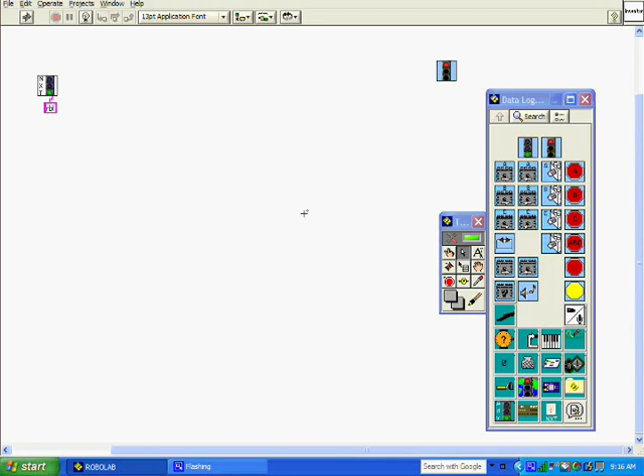To start this, let's go to the Structures menu, then pick Jumps and Lands, and pick a red land. Left click and drag. This land icon indicates the start of our loop.

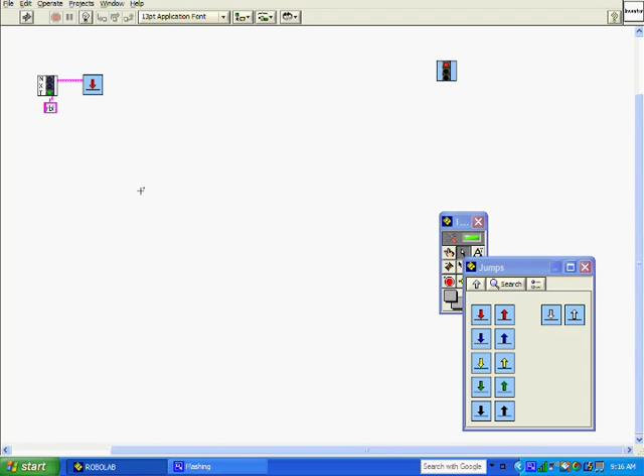We need to utilize a light sensor to indicate what the color of the surface the robot is on. Go to Forks, choose NXT Light Sensor Fork. Left click and drag. There are 6 ports with this icon.

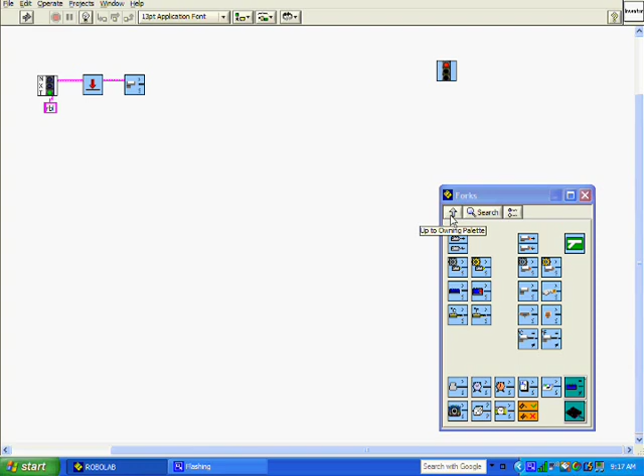The first port we'll look at is called port. On your brick there are numbered ports from 1 to 4. This is where you connect your light sensor to. I am choosing port 1. Now to do this, go back to main menu, then to modifiers. Then choose input 1, and then connect the port to input 1.

The light sensor will measure the amount of light reflected off a surface. They will express the amount of reflected light by a unitless number. Lighter surfaces reflect more light and have a higher number. Darker surfaces reflect less light and therefore have a lower number. The compared-to number is a threshold number that decides if you are on a dark or light surface.

Right-click over this port and create a constant. I'm going to choose that my threshold number be 45. However, this could change in different lighting environments.

So in my case, if the reflected light is more than 45, the robot is on a light surface, and I will only want the right motor to move. Now, if the reflected light is less than 45, then the robot is on a dark surface, and I will only want the left motor to move. This will induce what is called a penguin walk.

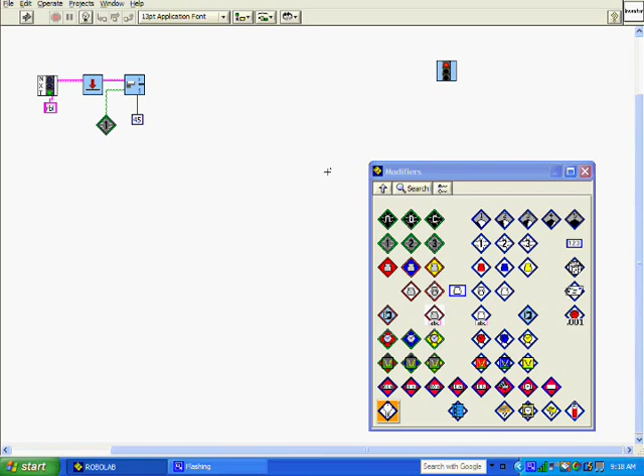Let's start with the first case, when the reflected light is more than 45. To start this, go back to the main menu, and first start with the stop sign: stop all ABC. We want to connect this to the port where it's more than. And now, we want motor C to move forward. Connect this motor icon to the stop sign.

Similarly, we can do the same when it's less than 45. Connect another stop sign to the less than port, and then connect a motor A forward icon.

Also, let's select our power levels for these 2 motors. Go back to the modifiers menu, then select power level of 2, and connect both of these motors to this power level. So now we've created a set of commands that allows our robot to follow the right side of a dark line. However, we have not told it how far to travel on this line.

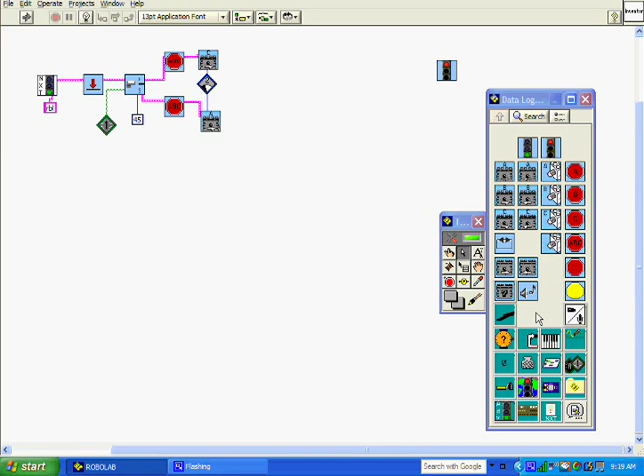The first step in solving this problem is to merge our fork. So go to the Structures menu, then go to Forks, and then go to a Merge. Connect your 2 motor commands to this merge.

To command how far along the line the robot will travel, we will use an NXT rotation sensor fork in the Forks menu. Connect the merge to this new icon. Now notice we need a port to measure how far along the robot has traveled, so we'll measure from motor A. Go back to the main menu, then to the modifiers, then go to output A. Connect port to output A.

Just like in the light sensor fork, we need a compare-to number. In this case, this is the total number of degrees of rotation for motor A. Right-click on this port, then create a constant, and type in 1000 degrees. So as the robot travels along the black line, it will continuously compare the total amount of rotations to 1,000.

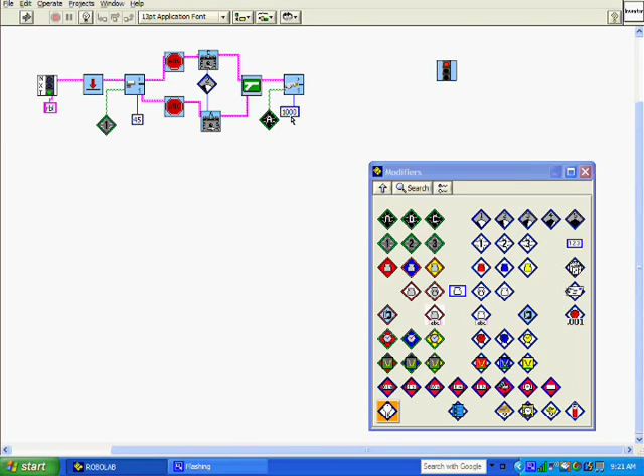So let's take the case when the total rotations is less than 1,000. We need to continue the loop through a jump command, which will then go back to the land command. We need a jump command to complete our loop. To do that, let's go back to the main menu, go to Structures, Jumps and Lands, and then pick a jump.

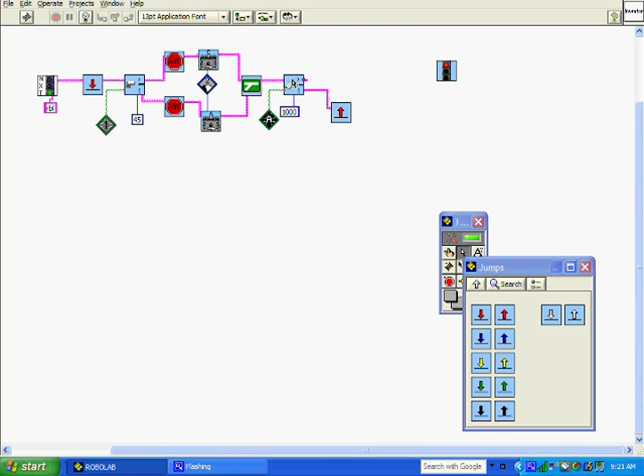Connect that when it's less than. The other case is when the total number of rotations is more than 1,000, and that's where we want to end our program. So first, let's get a merge.

Connect the bottom to the jump command and the more than to the top port, and then connect it to the red light.

So let's review this program once more. We start our loop with a red land, and then we go to a light sensor fork, which senses what surface the robot is on. If it's on a lighter surface, it will turn only the right motor. However, if it's on a dark surface, as in the dark line, it will just move the left motor, and it will induce what's called a penguin walk.

This will continue for a certain amount of distance, which is noted in the rotation sensor fork, at 1,000 degrees. So this program will continuously turn until 1,000 degrees is met. If it's less than 1,000 degrees, it goes back to the loop, indicated by the jump command. It jumps back to the land, and this is what we call a loop. However, if it's more than 1,000, it will end the program.